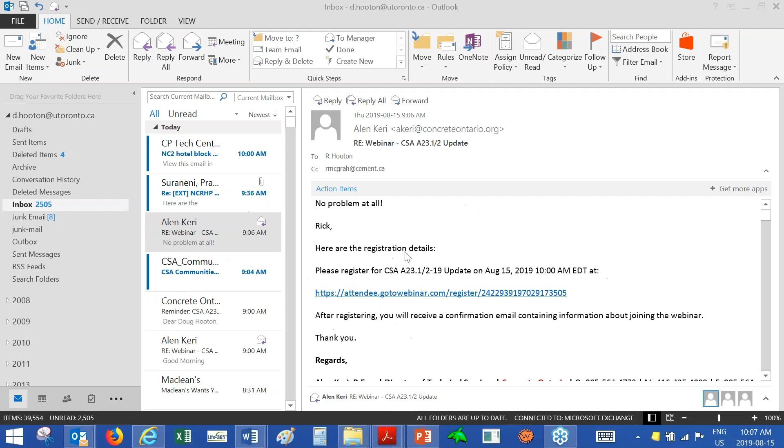Okay, great. I will wait to show my screen. Okay, get up and running. So you can see my screen now? Yes, you're good to go. Okay, hopefully everybody can see it.

Well, good morning, everyone. Hopefully you can stay awake for this exciting presentation on the new A23.1 and 23.2 standards. So the English version of the standard was published in late June. As Alen said, we were waiting for it.

So it has a number of revisions. The French edition, they've had some issues with it because of the translation problems. It probably won't be out till September in French. And of course, because it's the 19, we sequence these things. So the cement standard came out in 2018, the A3000. So it's referenced in the 2019.

Now that the A23.1 is out, we had to meet the deadline to be referenced in the next version of the National Building Code. And then once the National Building Code adopts it in 2020, the Ontario and other codes will pick up on it. The provincial codes will pick up on it as well. So there's a sequence to the way the CSA standards are organized, so we feed into the building codes.

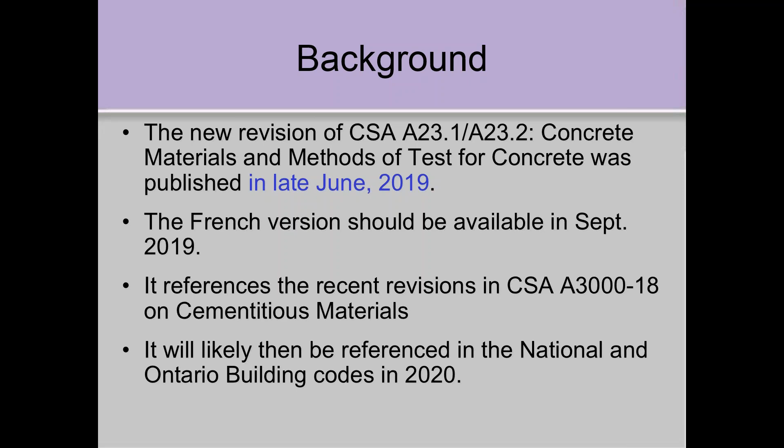And just to mention the cement standard, which came out last year, one item of possible interest is that we're looking at different supplementary cementitious materials. We have fly ashes, slag, silica fume, and some natural pozzolans, but one that's been introduced is ground glass, municipal ground glass that's been collected and crushed. It's not covered in the A23.1-19 yet, but it probably will be in an amendment. And because of all the recycling of glass, ground glass as a pozzolan is occurring both in the US and Canada.

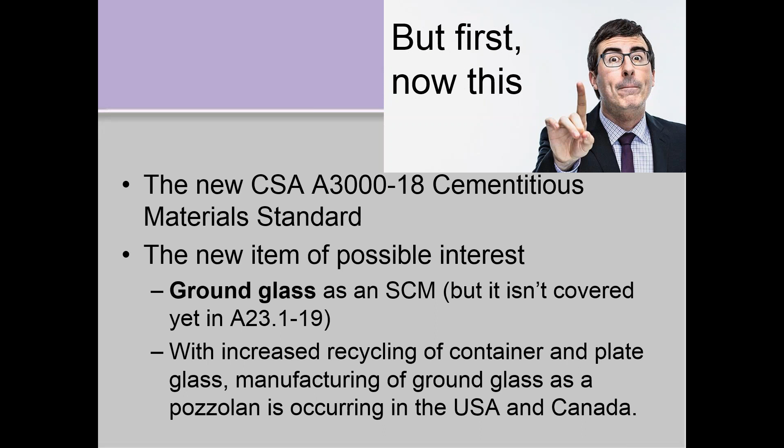I think there's 5 companies in the US and at least 2 companies in Canada. I think Quebec and New Brunswick have companies creating ground glass to use as a pozzolan, because it's glassy silica, which is essentially what SCMs are. And so I thought I'd spend 2 slides on that just to explain it, because it's not in A23.1 yet, but you may see it at some point.

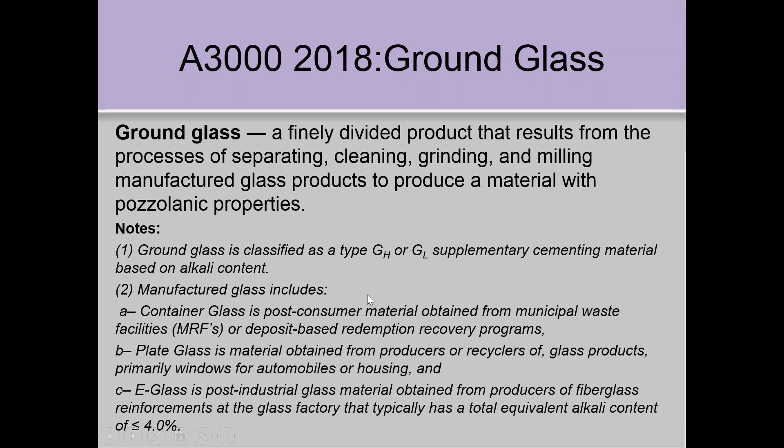So anyway, it's just clean glass that's been ground up to the cement fineness. And there's 2 types of glass. The bottle glass is high alkali glass, so we call that G sub H. And if it's from fiberglass recycling, it has a lower alkali, so they call it G sub L. But I don't think there's anybody doing the fiberglass one in Canada. So it's container glass, plate glass are the main components here. And they're very consistent in quality. Container glasses are almost all identical in composition. And it works as a very effective supplementary cementitious material when it's ground up.

But the main concern with it is the high alkali content. It's up to 13%, maybe even higher sodium equivalent alkali. That way, if you had an ASR problem, you wouldn't want to necessarily use this material as an SCM. But you can control it if you put enough regular fly ash and slag together with it.

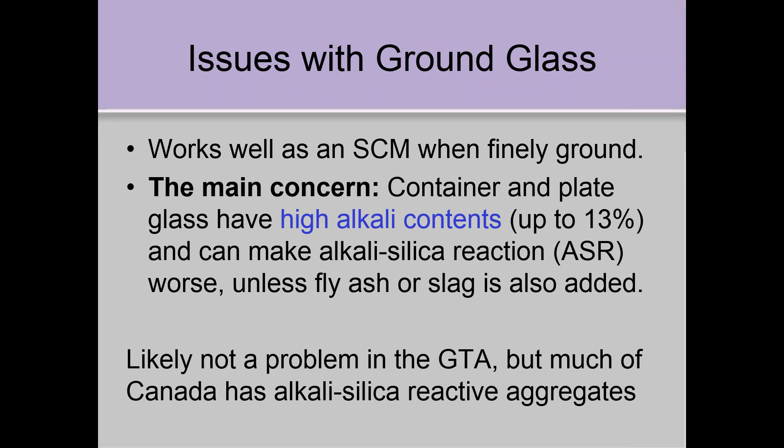And that sort of work's ongoing, and I think that's what we're looking at before we adopt it in the concrete standard. Now, ASR is not a big deal in the Greater Toronto area, but much of Canada has alkali silica reactive aggregates, so it would be a concern.

Okay, on to A23. So the way the standards committee works, we had 38 voting members and 31 associate members that represent different parts of the industry. We have producer members, which would be the concrete producers, raw materials suppliers, which would be the aggregate and cement and admixture suppliers, service professionals, which are the consultants, testing agencies, users, which would be people like MTO and that, general interest, which would be somebody like me who's just an academic or has no stake directly in industry, and then regulatory interest members, which we don't have any, I don't think, on the committee.

The committee up till the new edition came out was chaired by Chris Rogers, formerly with the MTO, was their geologist petrographer, and I've just taken over since our last meeting in May. And the executive committee of the new committee that will come out with the next edition in 2024, Bart Kanters from Concrete Ontario is on the executive, along with Phil Trunk, formerly of CRH, Mike Thomas from University of New Brunswick, and Gordon Lehman from Stantec, out in Dartmouth, Nova Scotia.

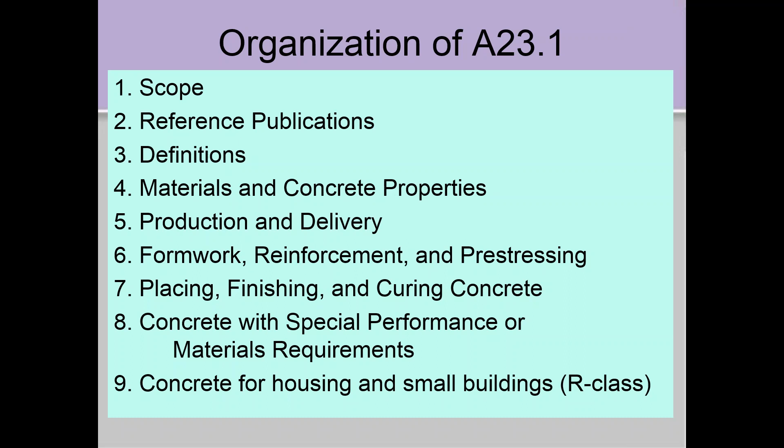8 is concrete with special performance or materials requirements, so all the different specialty materials are in there, as opposed to the regular ready mix. And I'll walk through a couple of those. And then chapter 9 is on residential housing and small buildings, the R class.

So section 8, as I mentioned, all the specialty ones. We have high performance concrete, which has been there, but we've added a new section of ultra high performance concrete, since that has made its appearance in Ontario in the last 5 or 6 years. And we have a new annex that goes into ultra high performance concrete. It's almost like a specification, but it's non-mandatory. It's an annex. The other ones are pretty much the same.

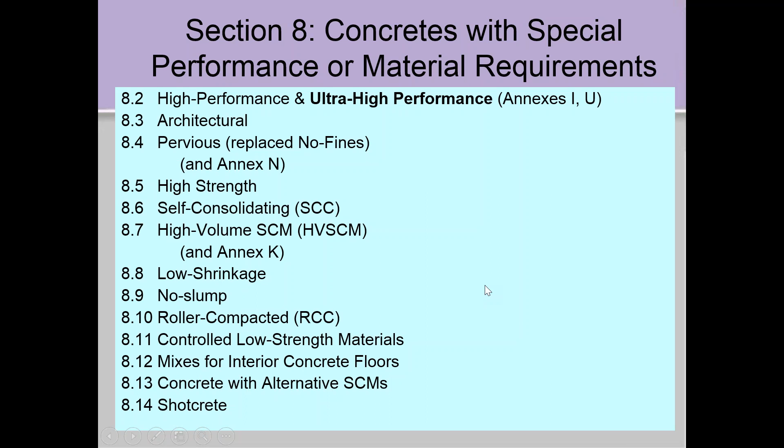We have pretty much the same. And I think the shotcrete's fairly new as well. It's been added to the section on shotcrete. Okay.

So I'll walk through the major changes, then I'll go into more detail. One of the biggest changes is in clause 4. And we've taken a bunch of the stuff out of clause 4, which people were concerned that some of that stuff was contractual information - it shouldn't be in the body of the standard. So separating out the requirements for the concrete from the contractual stuff, we put the contractual related information into standard practices, which are directly referenced in clause 4.

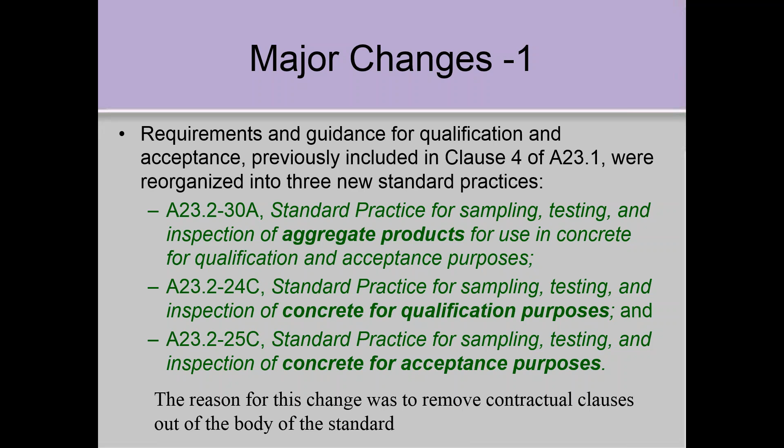So we have 30A for sampling, testing, and inspection of aggregate products for use in concrete - so it's the aggregates one. Then the 2 for concrete are 24C and 25C: 24C is sampling, testing, inspection of concrete for qualification purposes, and sampling, testing, inspection for acceptance purposes is 25C. So separating out the qualification requirements from the acceptance requirements.

We've also made substantial changes to the section on mass concrete, including the requirements to submit a thermal control plan for controlling and monitoring temperature and temperature gradients. A lot of the big contractors are doing this already, so it's a matter of trying to bring things up to speed to avoid some of the problems that have been going on with thermal cracking. Because mass concrete isn't necessarily things bigger than a meter anymore - with high cement contents, there's substantial heat in even smaller elements now.

We got new requirements for slump of concrete for interior concrete floors, updated Annex P on potential deleterious impact of sulphide minerals in concrete aggregates, including some new test protocols related to that. And this has to do with a big problem that happened in Trois-Rivières in Quebec over the last 5 or 10 years, where there were huge durability problems, and I'll talk more about that later.

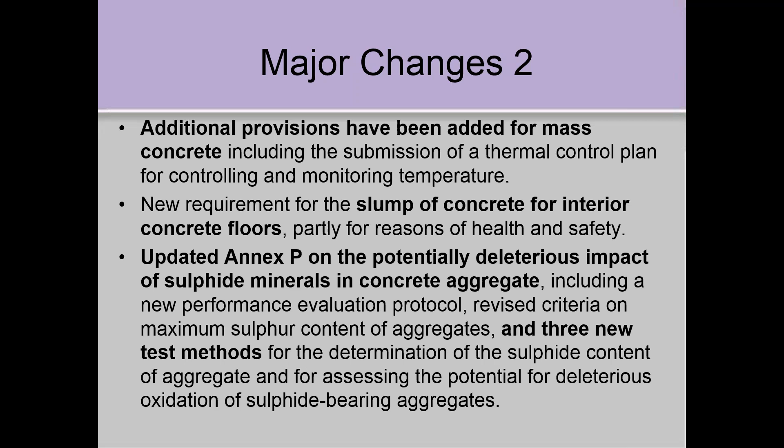So there's some new requirements for testing aggregates, which will impact aggregate suppliers across Canada, and I'll talk about that. And I said there's a new annex on mass concrete, and the new Annex U on ultra high performance concrete. We have two classes, minimum strengths of 120 and 150 megapascals. But some of these concretes are getting 250, 300 in some cases, but we've set these limits at 120 and 150.

And we have one new test method, 26C, A23.2-26C, bulk electrical resistivity of concrete. And again, this is similar to the 23C, the rapid chloride permeability test, but it just measures electrical resistance, and instead of spending the whole day measuring the Coulomb values, you can do this test in about 1 minute, and it essentially gives you the same information.

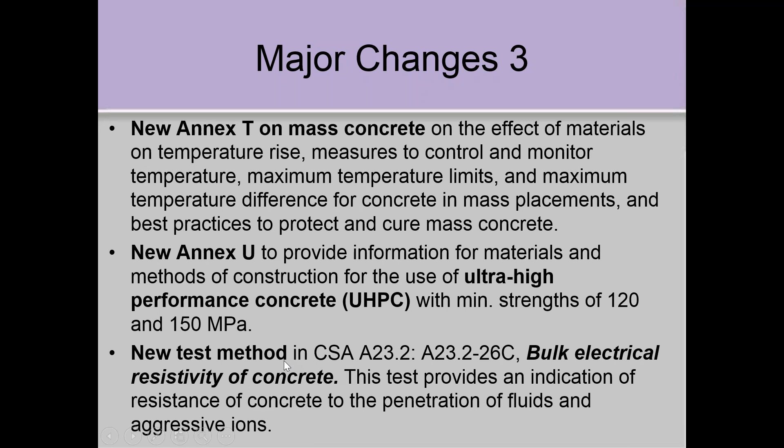One other change, the only change to Table 2, the exposure class table, is this thing I've circled here to separate out whether concrete's going to be exposed to freezing or not. There were some concerns raised, especially with higher strength levels, like the CXL where you need 50 MPa, that if you didn't have freezing thawing exposure, it was difficult in some cases to get 50 MPa or the required strengths with air. And there was no need for air because they were never going to see freezing and thawing in service. So the idea is we've added that new column to say if it's not exposed to freezing, the air content requirements are not applicable. That's what the N/A stands for. It's just a clarification issue.

There's been no other changes in the standard except to say, look, if you don't have freeze-thaw, you don't need to supply air. Sort of a common sense approach, but it had to be outlined because some designers were not accepting it otherwise.

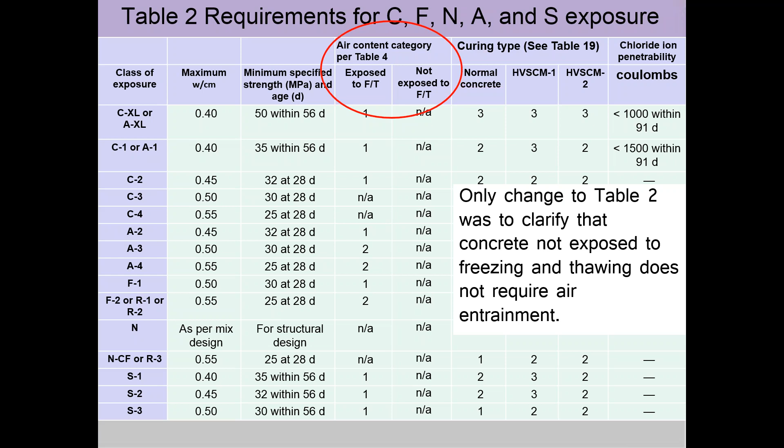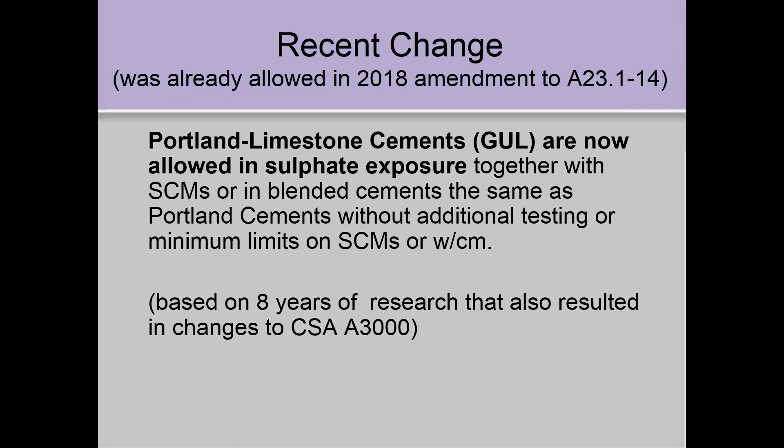This change was already in an amendment that came out last year in the A23 - that Portland limestone cements, those cements that have up to 15% interground limestone, are now allowed in sulfate exposures. Before, we had some special requirements for testing them if they're going to be placed in sulfate exposures. But based on extensive research that I was involved in, and Mike Thomas and others were involved in, we've now removed all those requirements. So now you just test it the way you would with any other cement, and there's no special limits on the concrete.

And well, there it is there. So we've changed Table 3. We've added moderate sulfate limestone B for blended cements - that's what MSLB stands for - and high sulfate limestone blended cement to the table categories for the S1, S2, and S3 categories, which are based on severity of exposure.

We've also added HSE, an equivalent, because some specifiers, especially in Alberta, were not allowing ready-mix companies to supply a GU cement plus, say, a slag or a fly ash as equivalent to a blended cement. They said, well, it's not on the list. So we've created HSE as equivalent to a high sulfate resistant blended cement, to say that if you make SCMs, you can use GU cement and call it a sulfate resistant equivalent. It seems like common sense, but there were some designers, certainly in Alberta, that were not accepting this, which was causing problems. So you can use those cements, and for anything that's not a straight Portland cement, there's performance requirements in terms of a mortar bar expansion test. That's always been there.

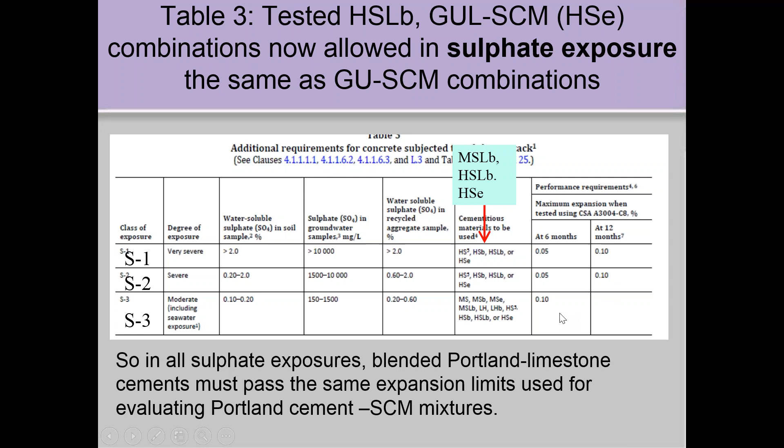So since I'm on the sulfate story - where are sulfate exposures? Of course, there's big problems in the prairie provinces. The lower parts of Alberta, Saskatchewan, and Manitoba are very high, ultra-high exposure sulfates - it's an old seabed. But there's also sulfates near Niagara and along Lake Erie because there's gypsum-bearing layers in the shales there. In the Toronto waterfront, south of Front Street, is a moderate sulfate exposure because, again, that same shale layer - which is now basically landfill south of Front Street - used to be the lakefront.

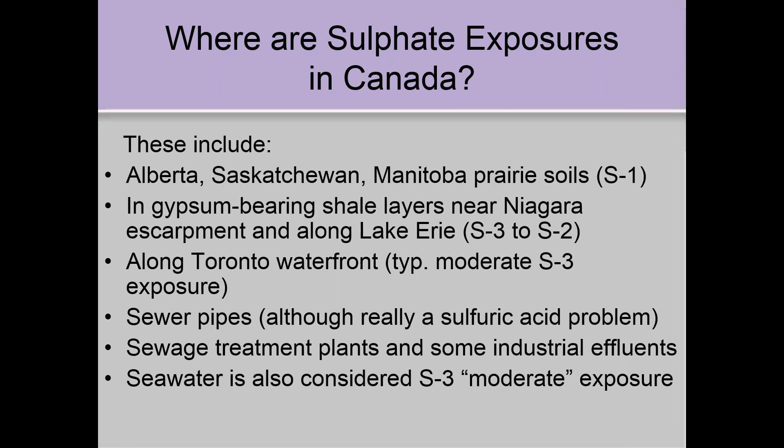And of course, there's problems in sewer pipes where we require sulfate-resistant concrete, although it's really an acid problem because of the bacterial acid formation. Sewage treatment plants, some industrial effluents, and seawater is considered a moderate exposure. In addition, of course, it's always chlorides because of the salt in seawater, but it's also a moderate sulfate exposure. So that's where the exposures are.

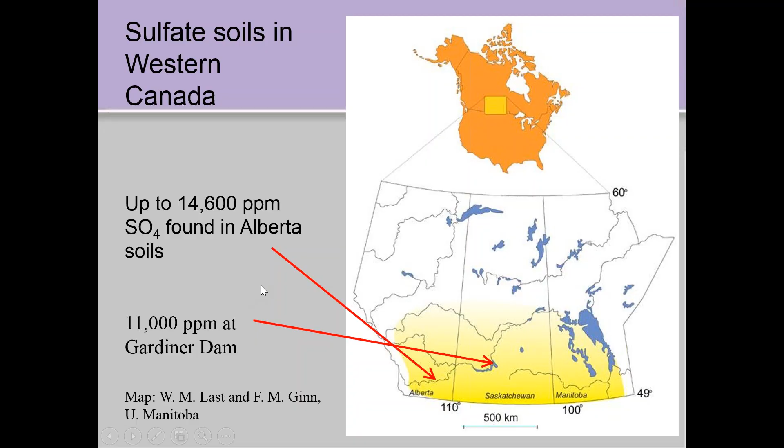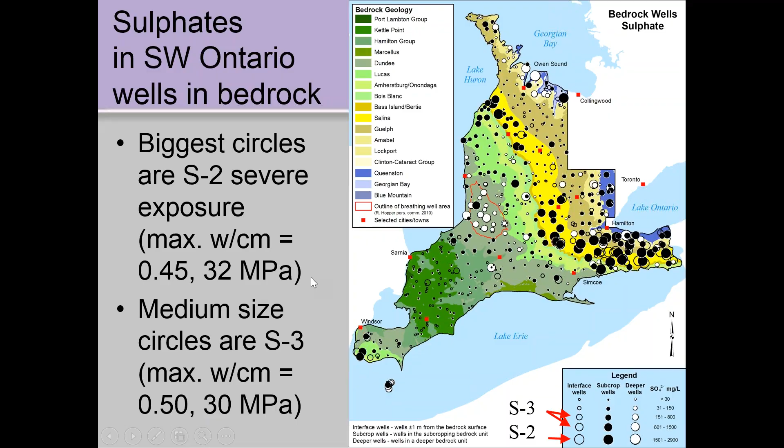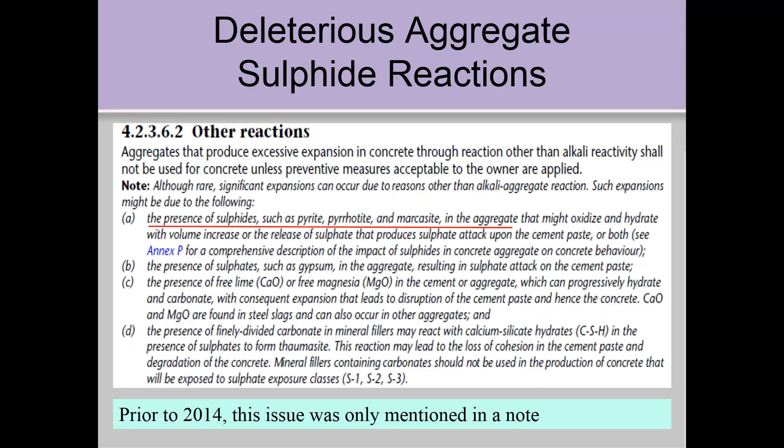I mentioned the sulfides in aggregates, this Trois-Rivieres problem. We had a note, underlined, that certain sulfide minerals—people are aware of pyrite, iron sulfide that causes rust stains—but pyrrhotite was one that nobody had paid much attention to. It's far more severe than pyrite and causes some durability problems, which I'll show you. There were serious problems around Trois-Rivieres, Three Rivers for you non-French speakers.

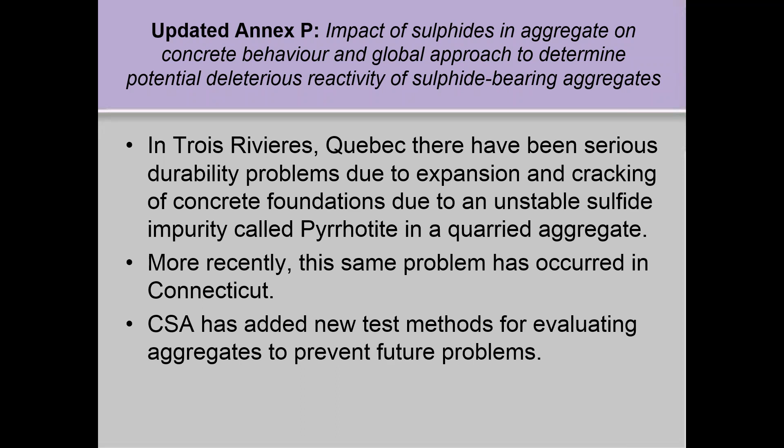The same problem has now outcropped in a very similar rock formation in Connecticut, just south of there, and that's caused some big legal issues. So we've developed some new standards. There's been a lot of research on this, especially by Benoit Fournier at Laval University and Medhat Shehata at Ryerson, to come up with new test methods, which are located in Annex P of the standard.

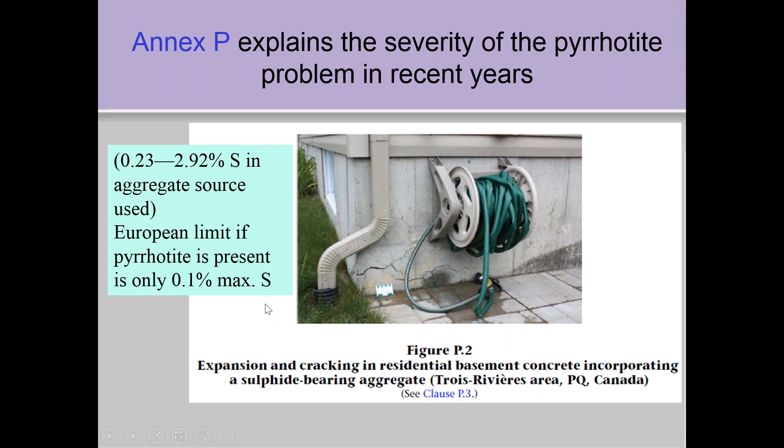The Europeans have a limit of 0.1% sulfide sulfur if it's pyrrhotite. They've had to raise over 100 houses. It came from one quarry near Trois-Rivieres, and these are brand new homes. They basically had to raise them up, remove the foundations, and replace them.

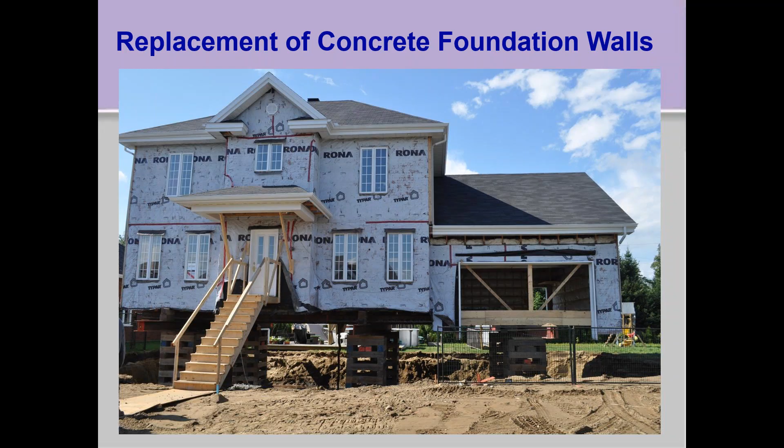It's been making the news since 2013. People are looking for money from the government, and Quebec's thrown money at it. The cost of moving or fixing one house was $125,000, all because somebody didn't test the aggregates.

If they'd tested the aggregates, and maybe there was more definitive information for testing, hopefully this would have been avoided. It's relatively unique to Quebec at this point, but there's potential for it to occur in other areas, so the new test requirements will be cross-Canada requirements for aggregate testing.

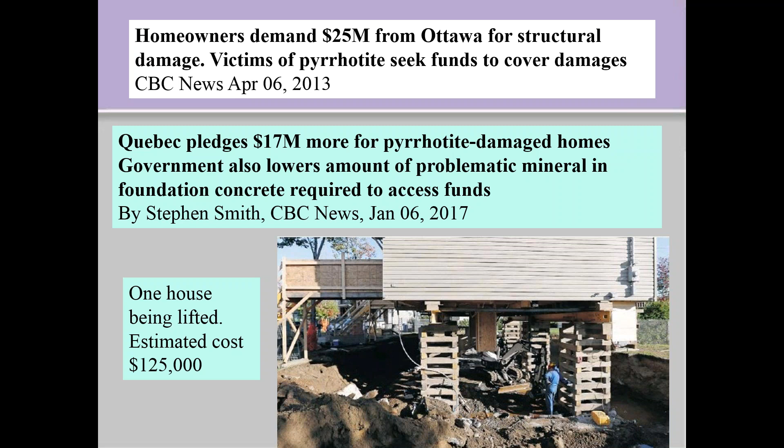So the test methods we've put in there: look at the sulfide sulfur content of aggregates. If it's greater than 1% total sulfur, you're supposed to reject the aggregate. If it's greater than 0.15% but less than 1%, you need to do some of this testing. And if it's less than 0.15%, you can accept the aggregate without any testing. So it's going to require aggregate producers to measure the sulfur content of their aggregates—that's a new requirement.

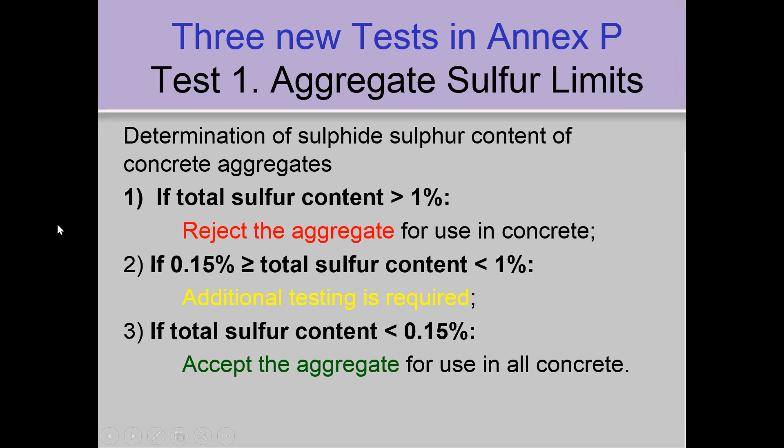So that's the first test, test the sulfur. The second one has a funny name, oxygen consumption test, because sulfides are reduced minerals, so they all want to oxidize, which is what pyrite does and causes the rust. It oxidizes, and pyrrhotite oxidizes more severely. So they measure the amount of oxygen you put in a sealed container with the aggregate, and measure the amount of oxygen consumed by the oxidation process.

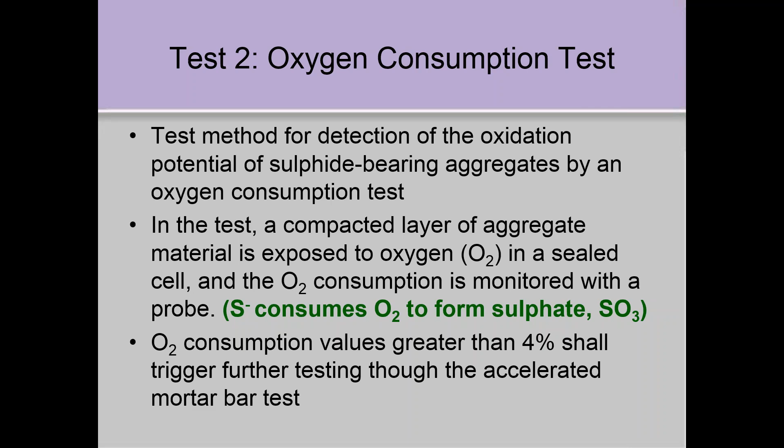And if it's above a certain amount, then you do a mortar bar test. Test number 3 is a 90-day test with mortar bars made from the crushed aggregate after some cycling in an oxidation fluid. Hypochlorite is just a way of oxidizing the sulfide minerals so that they expand. You can see the cracking of a mortar bar there where they've had this problem.

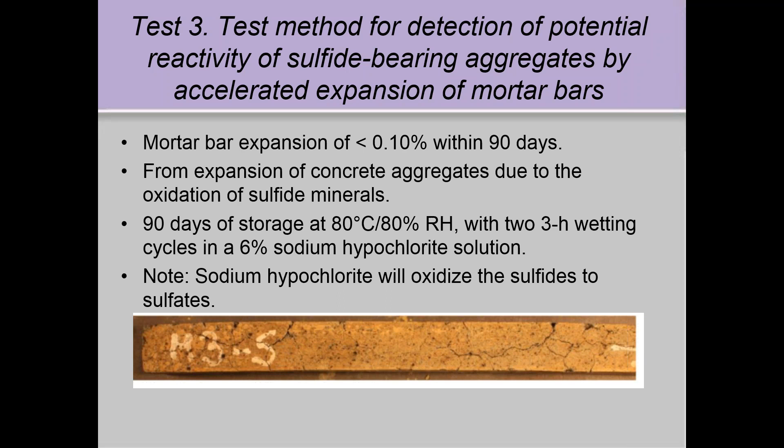So it's a pretty severe set of tests, but again, it's to address this issue, which has cost huge money. In fact, the federal government has just put something like $4 million into a research program at Laval University to further work on this issue so it doesn't happen again.

While I'm on aggregates, I just want to remind people that starting in 2014, A23.1 allows combined aggregate gradations—optimized combined aggregate gradations—in addition to the standard approach of picking a fine aggregate and a coarse aggregate, which often leaves a gap and doesn't lead to optimum packing. You can actually optimize the whole gradation as a single fraction.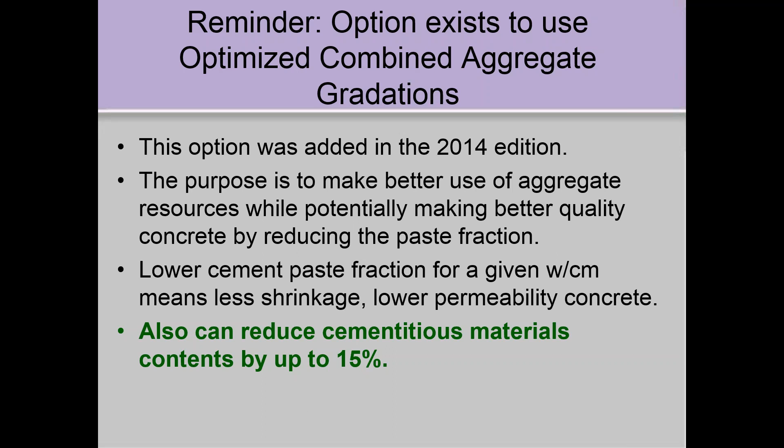And there are advantages to doing that if you have enough bins at the plant. Even 3 bins is sufficient. You can lower the cement content of the concrete, maybe up to 15%. And if you have less cement paste in the concrete, you're going to get less drying shrinkage and lower permeability, because permeability occurs through the paste fraction. So there's some economic advantages, and there's also technical advantages to doing this.

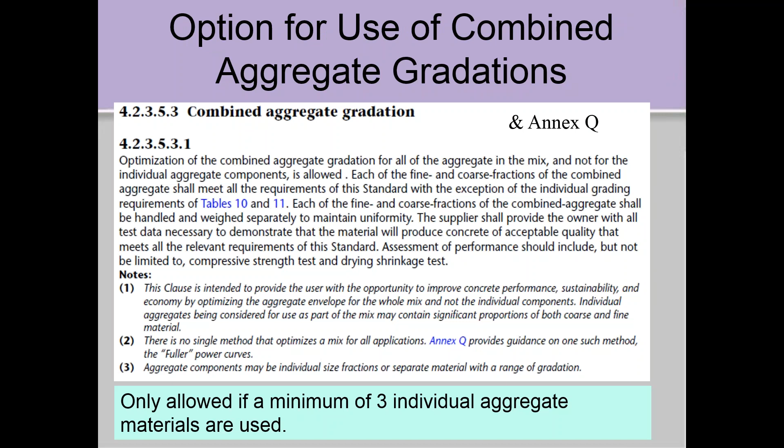It's in section 4, again, combined aggregate gradations. It's also an example given in Annex Q. And you basically optimize the whole gradation of the aggregate. Then for testing purposes, you split it on the 5mm sieve, and test everything above 5 as a coarse aggregate, and everything minus 5 as the fine aggregate.

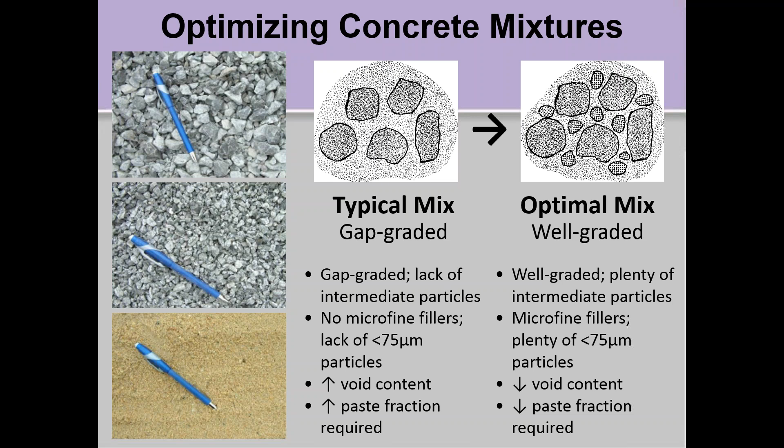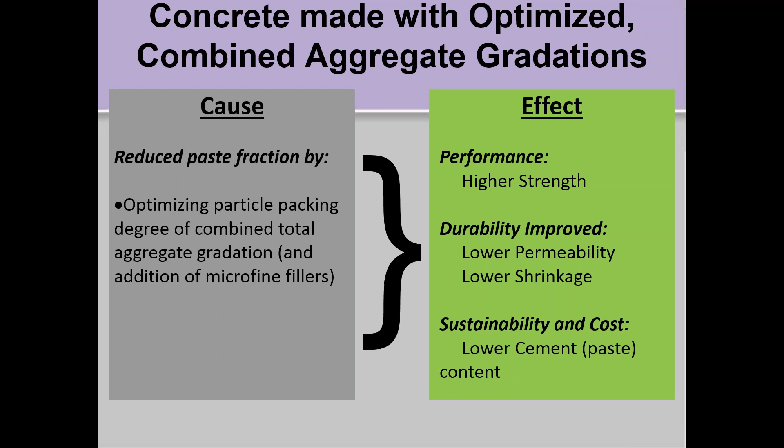So often this can be done just by fitting an intermediate material, even waste chip material, that fills the gap between the fine and coarse aggregates, so you get better packing of the aggregates. And again, you can get higher strengths, lower permeability, lower shrinkage, and better, more sustainable concrete because you're reducing the cement fraction and lowering the paste content.

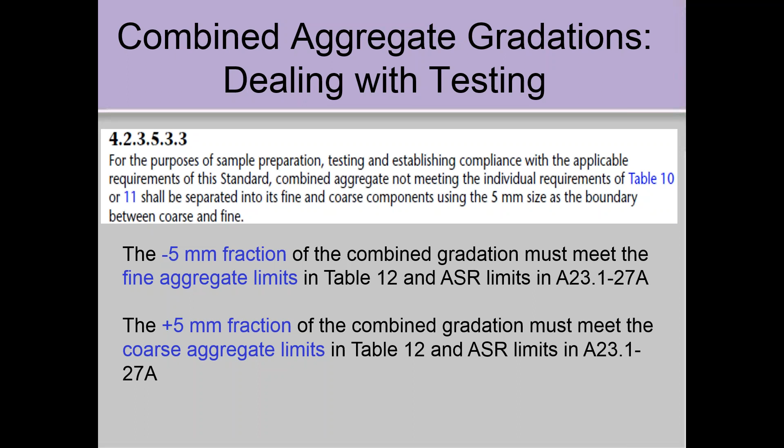Anyway, there's the split, and you test according to the aggregate tables based on the plus or minus 5mm fraction of the combined aggregate. So anyway, it's out there. I'm not sure how many people have tried it, but it offers an opportunity to reduce cement content in concrete and make better quality concrete.

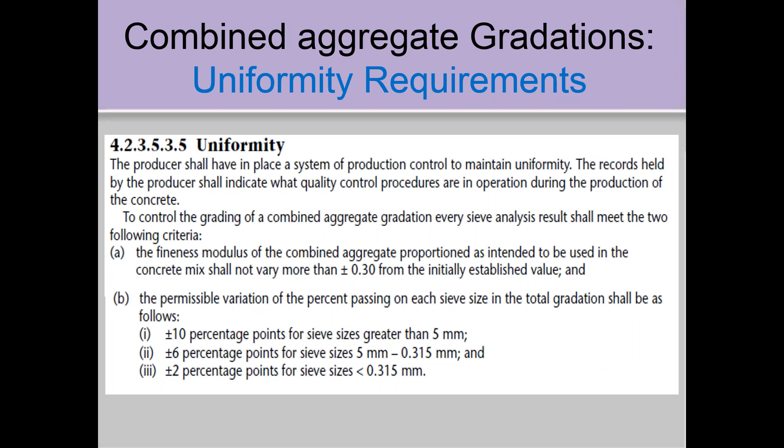And there's some uniformity requirements to check that you're getting a uniform combined aggregate gradation, based on the sieve fractions not changing more than a certain amount over time.

Okay, on to the 2019. Now, section 4.4 probably has the biggest impact on the producers here. So as I said, we've developed these new standard practices and taken a lot of the information out of 4.4 and put it in these standard practices, and 4.4 just references these practices.

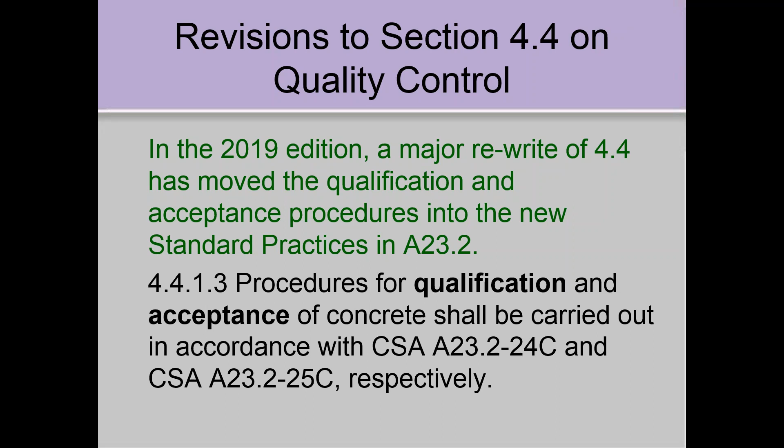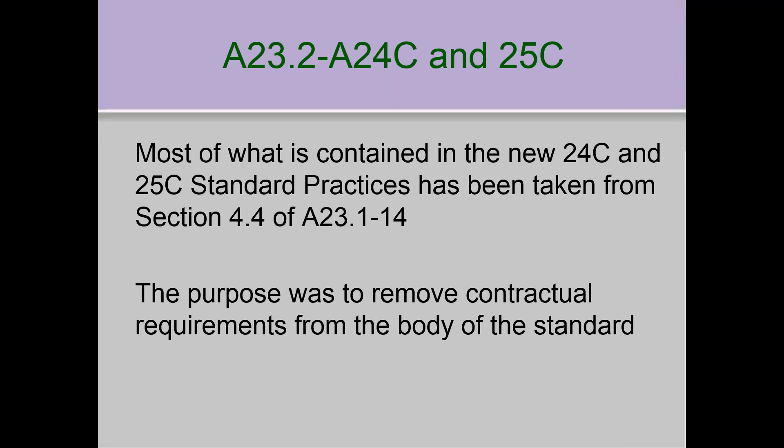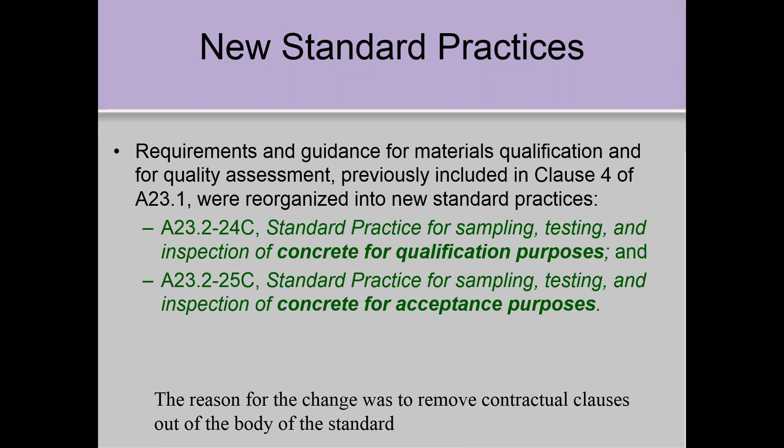And again, to remove the contractual bits out of the body of the standard, which a number of agencies, like the MTO, had problems with. And as I said, we got the one for the practice, 24C for qualification purposes of concrete, and 25C for acceptance purposes.

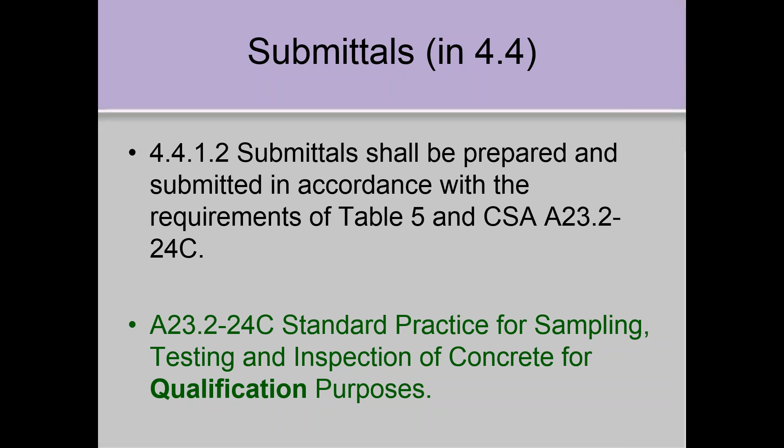And so 4.4 now says things like 4.4.1 and 2: submittals shall be prepared and submitted in accordance with the requirements of Table 5, which is the performance versus prescription table, and A23.2-24C, which is the standard practice. So for the submittal purposes, you go to the standard practice for things you need to put in the submittals.

And submittal requirements shall be, this is out of into the standard practice now, 24C, appropriate to the scope, size, and nature of the project. In other words, for small projects, you're not going to do as much as for a big project. And the supplier shall submit documentation to the satisfaction of the owner demonstrating the proposed mix design will achieve the required strength, durability, and performance requirements. That's all in the standard practice now.

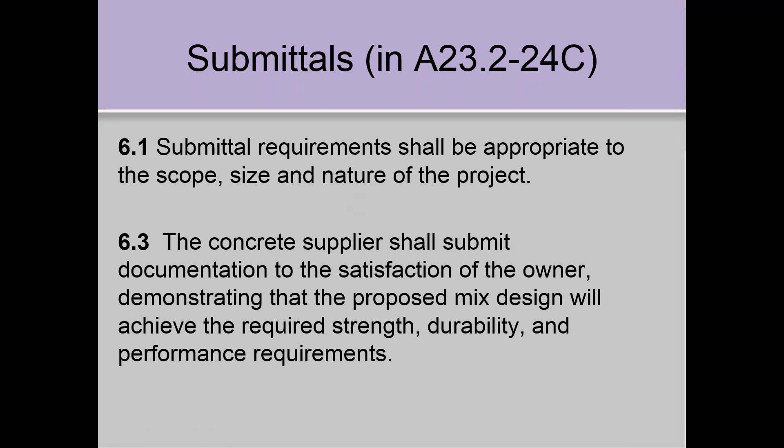And unless otherwise specified, include a review of data demonstrating the potential performance of the proposed mix design, and if required in the contract documents, could require trial batches of a proposed mix design to get the test data.

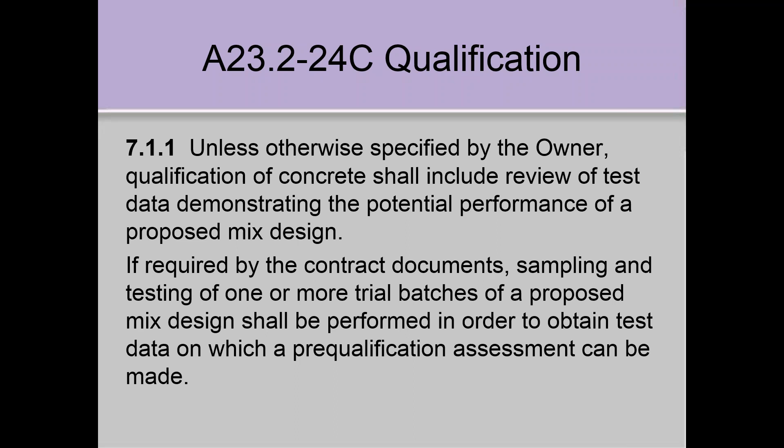And the practice repeats what's in Table 5 for the performance alternative, what the supplier, the concrete supplier, has to certify, which is right out of Table 5. Certifying the plant, equipment, and materials comply with the requirements of the standard; certifying the mix design satisfies the standard; and production delivery meets the requirements of the standard; certify the concrete complies with the performance criteria specified; implementing a quality control plan to make sure the owner and contractor's requirements will be met, if required; and provide documentation that the supplier meets industry certification requirements, if specified. So that's right out of the existing Table 5. There's nothing new there, it's just put it right into that standard practice.

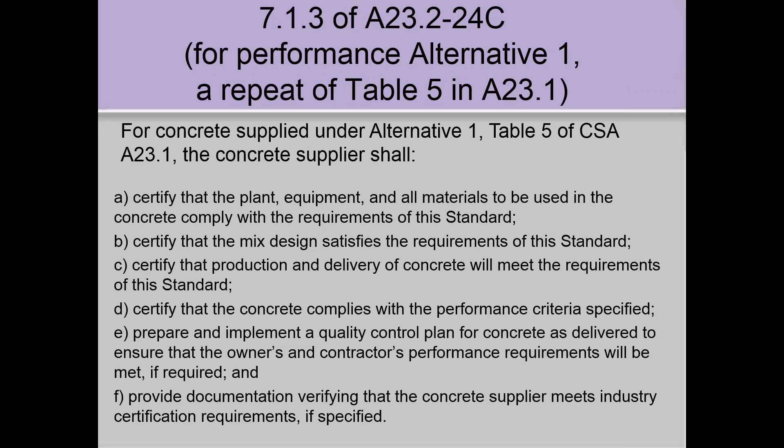So back in what's in 4.4, they've added material on the testing labs being responsible: lab and field personnel shall meet the requirements of A283 to the appropriate category, or ISO 9001 — that's in because the Quebec industry uses 9001. So the lab people have to be certified. All testing reports are distributed and available for audit by the certification, and all test data has to be reported within 5 days. I don't think that's changed, but that's the test lab responsibilities.

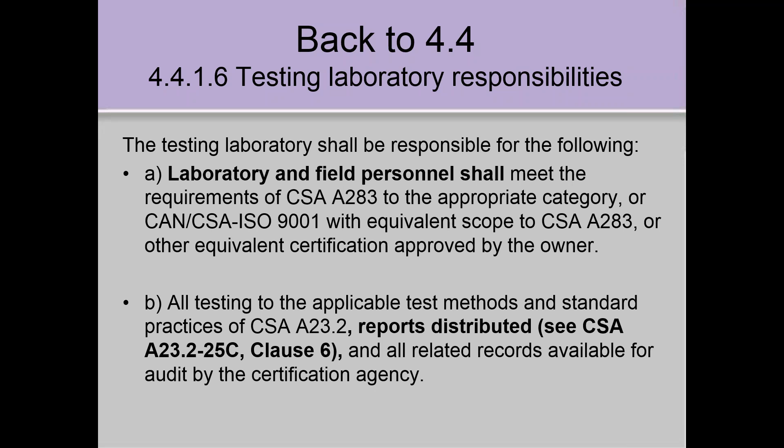And for acceptance purposes, as opposed to qualification, you go to 25C to do all the sampling and testing according to 25C. And then subject to project specs, the owner may accept or reject proposed materials and mix designs based on information provided in the pre-qualification submittal. But that's a separate issue.

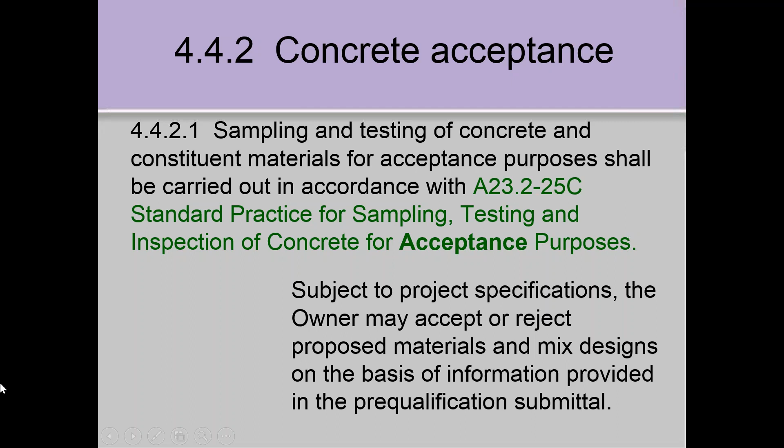Okay, so a lot of it — there's almost no change in 4.4 now, almost no changes in total, but a lot of the information's just been transferred to these standard practices. So there shouldn't be anything too much new there. We just tried to make almost no changes, just moving material, some sections where we thought it was contractual, to these new practices.

On reporting test results, this is in clause 6 now. Test results should be provided to the owner, contractor, and concrete supplier within 5 working days of the test. Both lab and field reports shall include the information required by the test methods. There's a sample test report for strength in the annex of A23.2.

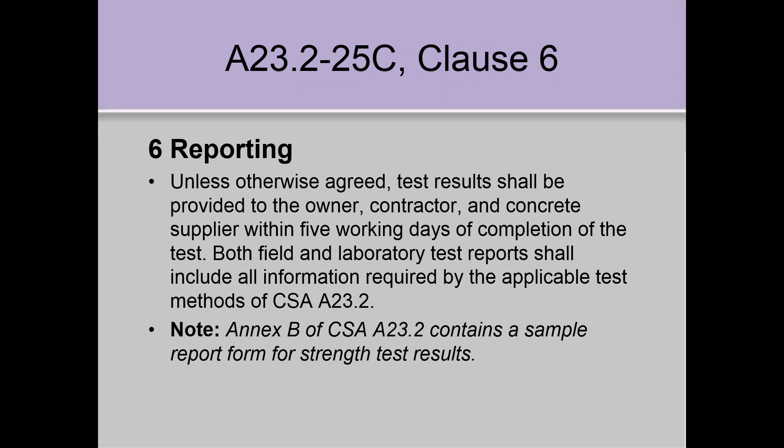If there's a dispute where there's more than one set of test results available from independent testing labs certified to the CSA, all test results shall be considered by the owner unless there's a defined referee testing program in place, like I think MTO has. So it requires people to consider all the test results. If the concrete supplier has their own certified lab testing result, they can submit that data and it has to be considered.

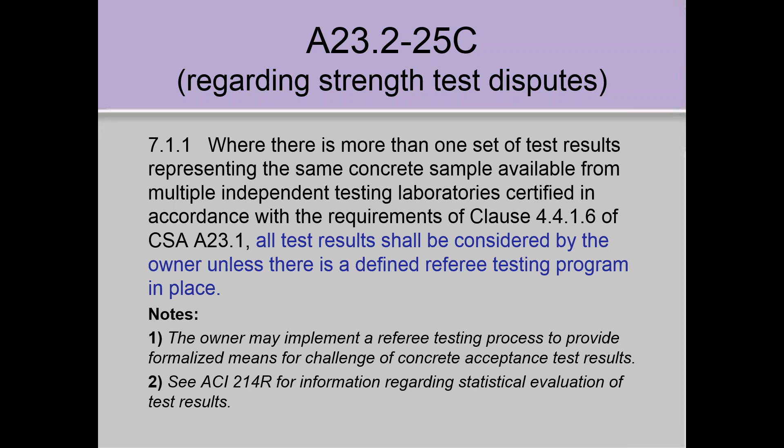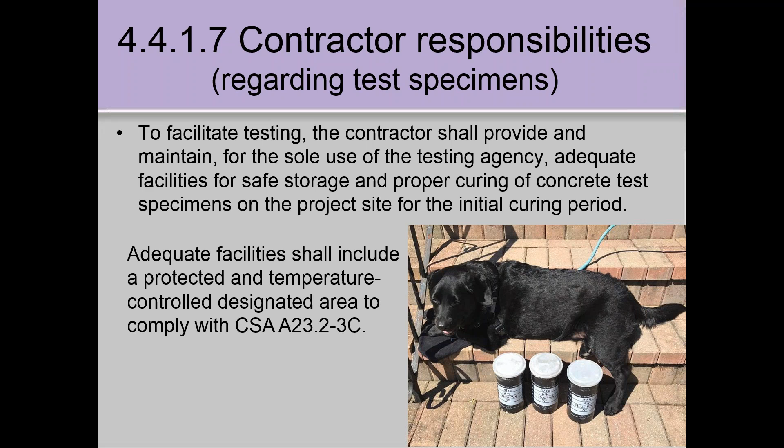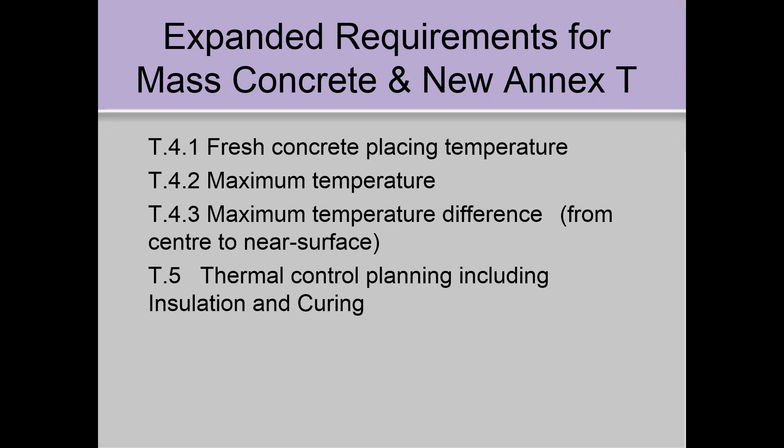This is the mass concrete section in the new Annex T now. It covers fresh concrete placing, maximum temperatures, maximum temperature differences, meaning from the center to near the surface, thermal control plans including insulation and curing. So that's all covered in this new annex, a lot more information, and it's to deal with some of the problems like this.

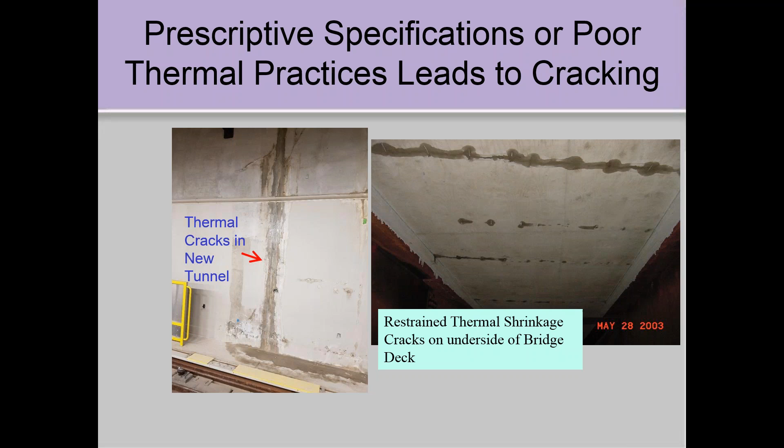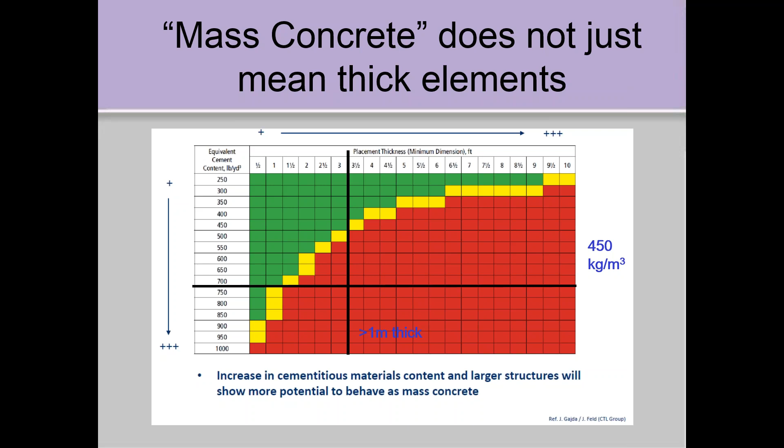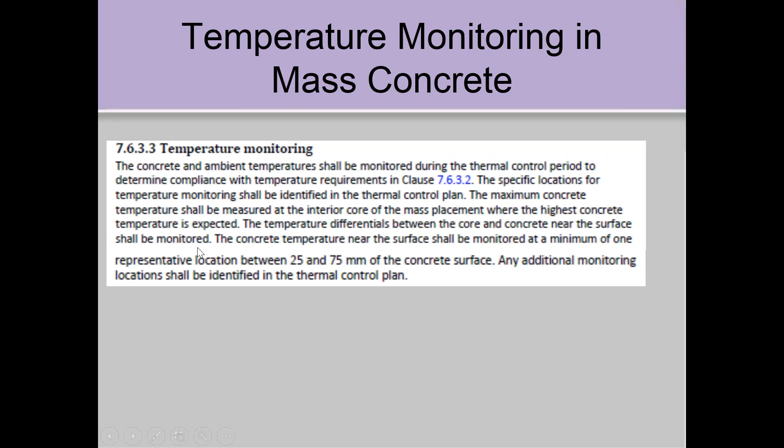It talks about how to do temperature monitoring, measuring the near surface temperatures between 25 and 75 millimeters from the surface, as well as the interior of the concrete, and looking for differentials.

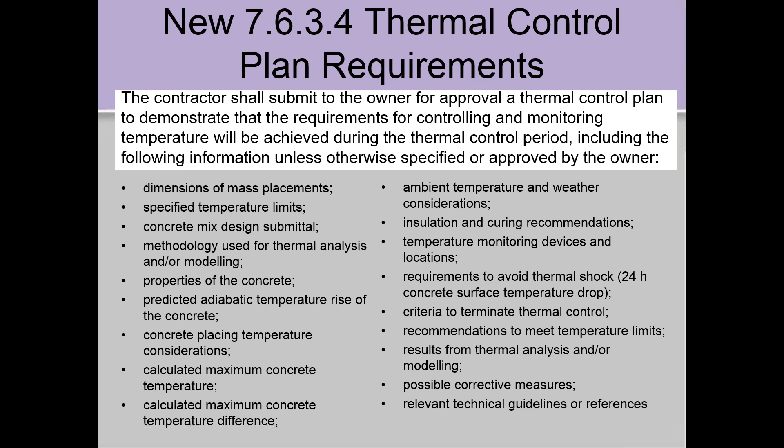So there's a whole bunch of stuff that needs to be done, and a lot of the large contractors are doing this. They put in monitoring systems, and there's a lot more of this going on now because these probes you can put in concrete, and wireless monitoring systems are pretty economic now for big jobs.

It also has information in the annex about insulation, to reduce thermal gradients. They're talking about 20 millimeter plywood, which protects concrete because it's insulating, but steel forms just pull the heat away. There's no insulation at all in steel forms, so you get different performance just by the type of formwork being used in terms of minimizing thermal gradients. So steel forms might require insulation.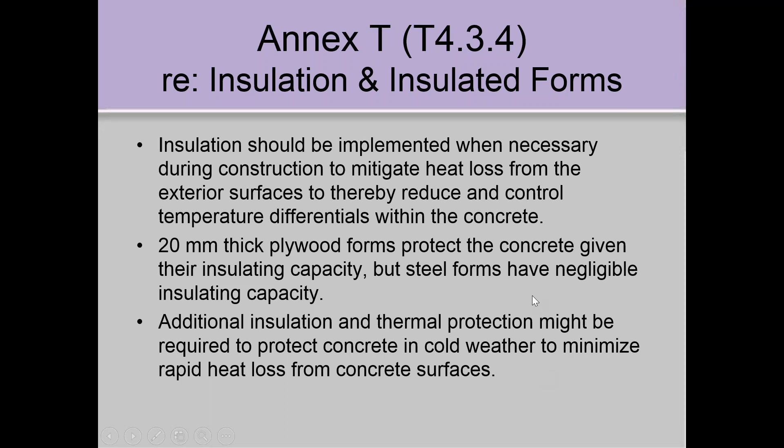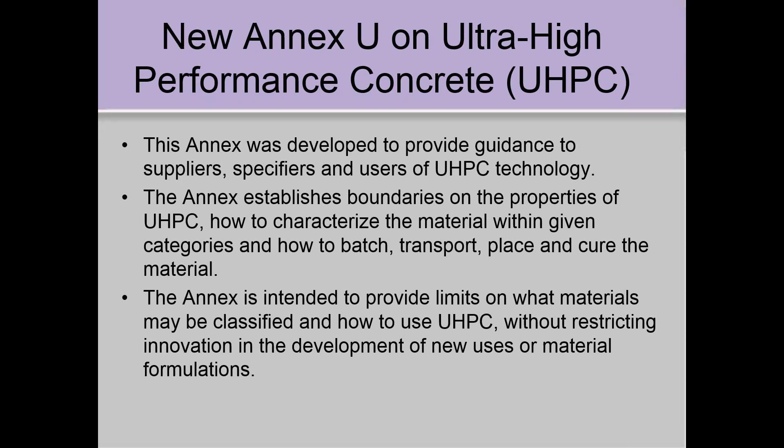Now the other new annex is on ultra high performance concrete, which has been hitting the industry. It's not a huge impact at this point, but it's growing. And it discusses how to deal with it because it's a completely different type of concrete. So it provides information on what's considered ultra high performance.

As I mentioned earlier, there are two minimum strength classes, 120 and 150 MPa. These are tested on even smaller cylinders, 75 by 150, because it's so strong that testing in a regular testing machine would be difficult. And you typically keep them in the molds till they're at 100 MPa.

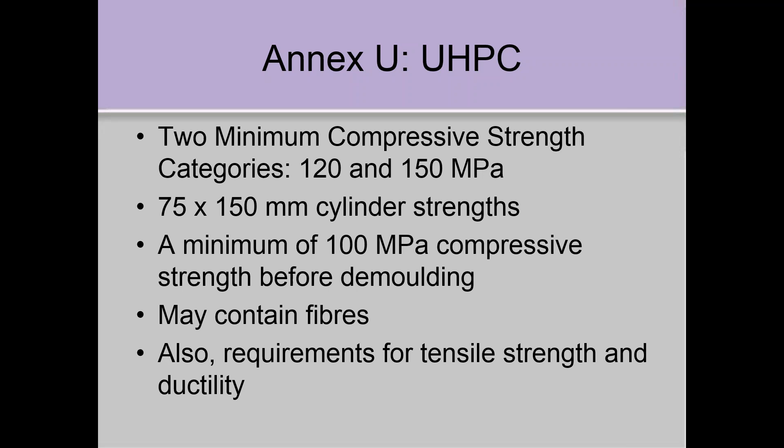Some of these ultra high performance concretes contain fibers, in fact quite a few of them, because a lot of the requirements also include tensile strength and ductility requirements. So it's not just the compressive strength.

So we've got three designations here in that annex, and DL stands for design life. So you have a 50-year design life, 100, or 200. Now they're a bit arbitrary, but they've set requirements for things like abrasion loss for pavements, or things like dam spillways, and salt scaling requirements, which are much tighter than the MTO's requirement of 0.8 kilograms per square meter.

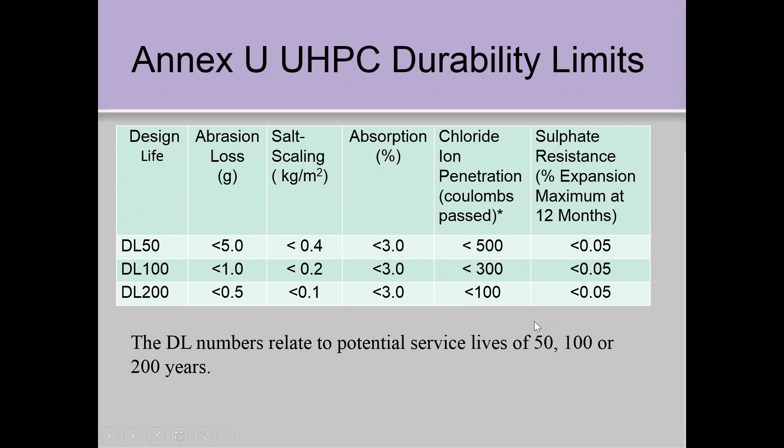Absorption requirements, chloride permeability requirements given as Coulomb values - you can see they're very low - and sulphate resistance. That's what's in there now. It's an annex, so it's not mandatory, but it's there.

And so it's different than other concrete. It involves particle packing. All the materials, including the cement, the fillers, and the fine aggregate materials, are particle packed. The maximum aggregate size is typically masonry sand. Now there are some with up to 8 millimeter aggregate, but typically we're looking at minus 3 millimeter size aggregate. You're optimizing the packing down to the nanometer level with these ultra-fine powders, silica fume, and even finer fillers.

And it requires a lot of heavy mixing to get it to go. It shows them pouring it out of a bucket, a wheelbarrow. We need high intensity mixing, high shear mixing, high superplasticizer doses, and a lot of this stuff. It's very dry to begin with because you're looking at water cement ratios less than 0.2, so it looks like dry sand almost. And you mix it and mix it and mix it, and eventually after a period of time it starts to flow and becomes this liquid material, like that wheelbarrow shown in the picture.

It's typically self-leveling, but to get reproducible results there's a lot of control that has to be exercised. And of course it's expensive - it's in a whole other ballpark for cost. But it shows them here using it for joining panels for precast, some sort of precast deck unit, where they put in high-performance deck units, then the rebars, and then they're putting in the filler strips with the ultra-high performance material.

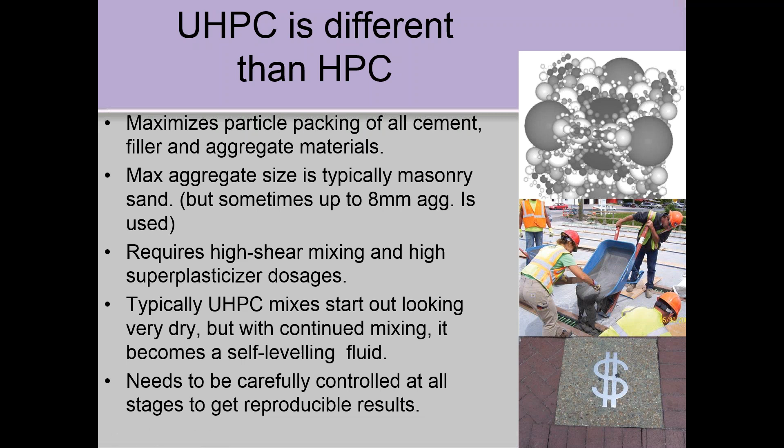And they consider all the fine materials in this, so not just cement and SCMs, but even things like ground powders of various sorts would be considered in this water-fines ratio. It shows the sort of strengths you can get at 7 days steam cured or 28 days water cured, the types of strengths we're talking about. This is an old paper, I just took it as an example of what you can get with these sorts of concretes. So it's a whole different animal.

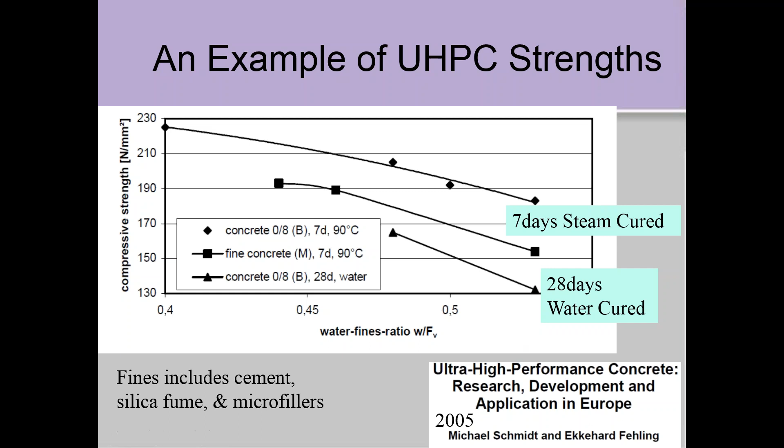And one example in Ontario where it was used is up near Thunder Bay on an overpass or underpass. They used pre-stressed ultra-high performance T-beam pile pier caps, and they made the column forms that are there - that's a column form out of ultra-high performance, stay-in-place column forms. They put them in place and erected them, and put the rebar inside.

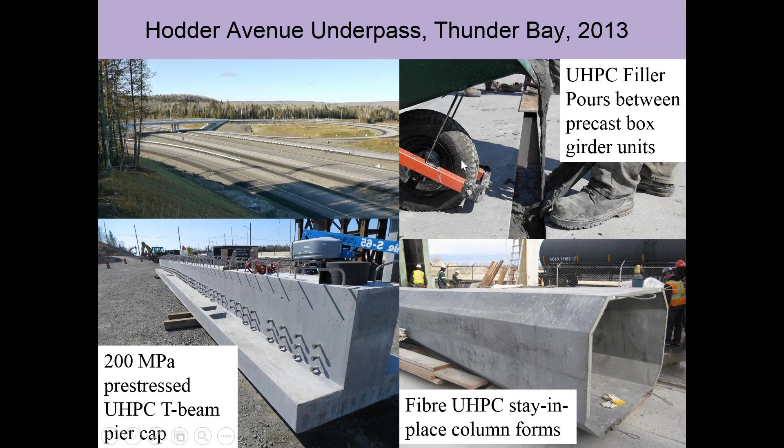They put regular high performance concrete on the inside, so the outer part that's exposed to salt is ultra high performance. And then they used filler strips on the precast box units, filling up the pour strips with this ultra high performance material - that's what it looks like. So that's ultra high performance on the beam here, a cross beam, and then the stay-in-place formwork, and then on the filler strips on the deck.

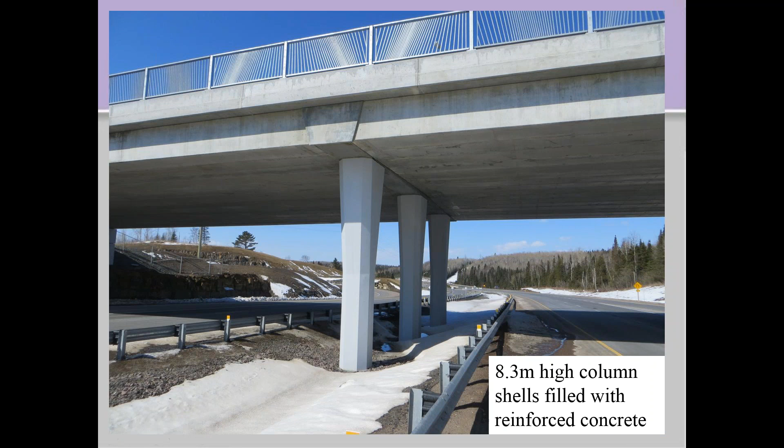Okay, anyway, in terms of A23.2, the test methods, we're constantly updating the format to make sure they have precision statements and the wording is clear. But the only new test method, as I mentioned, is this new bulk resistivity test method, which is 26C. The reason is, eventually, hopefully, it might replace A23.2 23C, the rapid chloride permeability or the Coulomb test.

It is much faster, and you can also test whole cylinders with this method. You don't have to cut discs out of it. You could take a cylinder, measure the resistivity end to end, and then put it in a testing machine and break it for strength. But at this point, because it's new, we've put it in there so people get used to it, and so they can compare the results. There's no test limits yet. We're going to wait and see on that.

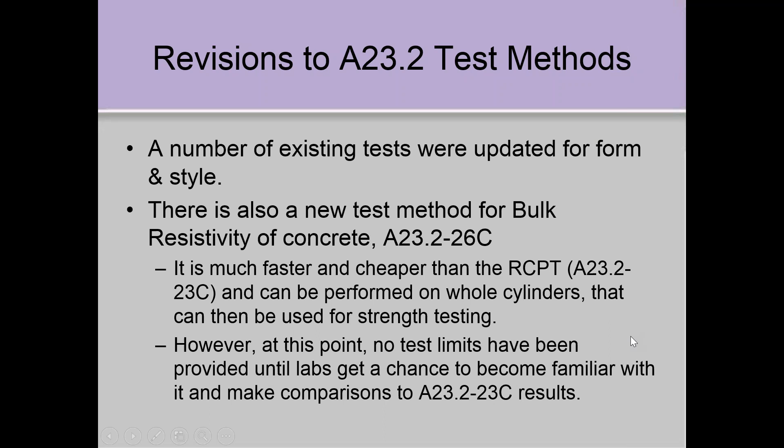So the top test is the 23C. You take a 2-inch disc, or 50 millimeter thick disc, of a cylinder, put it between two cells with salt solution or hydroxide solution, apply a voltage, and measure the electric current that flows through the concrete. You measure that over 6 hours, multiply the current times time, and you get coulombs.

That's the test people have been using for a while. It's a fairly rapid test, but it takes a day to set up to vacuum saturate, and it takes a day to run the 6-hour test. With this bulk resistivity test, you apply electrodes on the end of the cylinder, measure the electrical resistance to current flow, and correct it for the area and length of the cylinder, which is that little equation there.

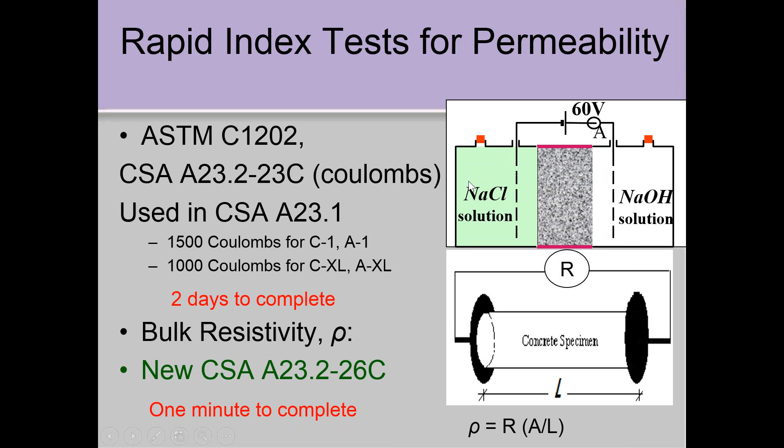So resistance times the area of the cylinder divided by the length gives you a resistivity value in ohm meters. You can do this test in 1 minute. If the concrete's wet, you put it between the two electrodes, the test takes a minute, and you get a result. You basically get the same information as that test that took a whole day, so it makes it much cheaper.

There's at least 3 commercial suppliers, maybe more, but these are 3. Germann Instruments has one, and they use a carpenter's clamp to clamp the electrodes in place to get good contact between the electrodes and the cylinder. Giatec's RCON out of Ottawa uses one with 2 electrodes with sponges on the ends, and they clamp the ends down, or you can throw a weight on top. Prosec has one too, with electrodes on top and bottom with wet sponges, needing a weight on top to get enough contact.

So it's a very simple calculation. It's the resistance you measure multiplied by the area divided by the length. Some of the machines actually have a little computer that does that calculation for you.

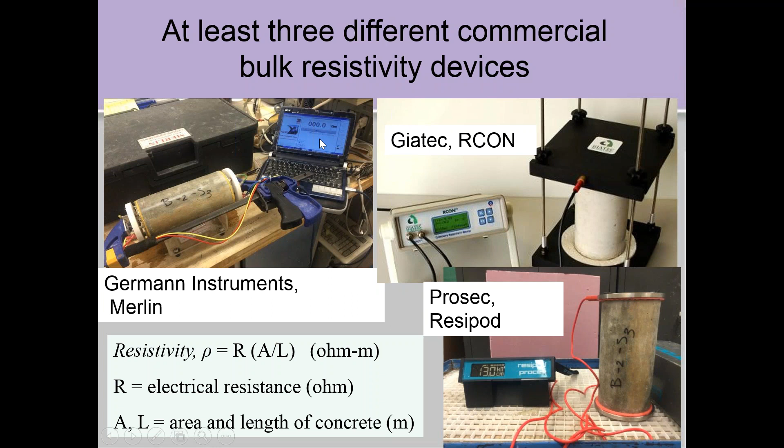Just as a rough comparison, we didn't put this table in because people were resistant to suddenly putting limits in for a new test method. But this provides some rough comparisons to Coulomb values that we're used to. So 1,000 coulombs, which would be ultra high performance concrete, would be around 200 ohm meters resistivity. I think MTO's got a 2,000 coulomb limit, which would be the 100 ohm meters resistivity. If you rank it on the same levels used in 23C, those are the sort of ranges you would have. Right now it's just a rough guide.

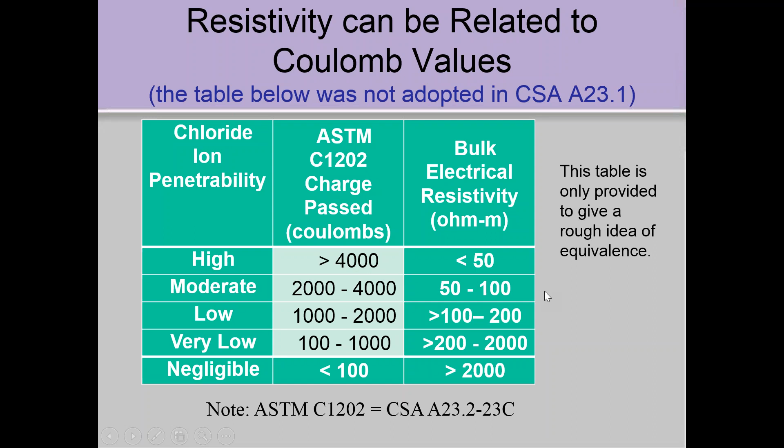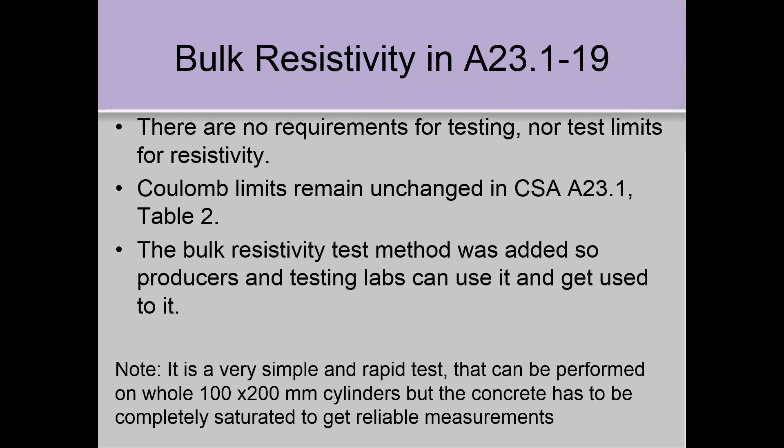A number of labs are doing the tests, so they can do comparative testing and get comfortable with it. It's a simple test, you just have to have a completely saturated sample to get reliable results. If the concrete's not wet, it's a good resistor when it's not wet. If it's saturated, then you're measuring the electrical flow through the pores in the paste fraction of the concrete.

Okay, so I'm getting to the end here. The CSA documents are living documents. Every 5 years we come out with a new one to fit into the building codes, and people on the committee bring forward issues that the industry is facing. We try and deal with them, or correct problems that have existed with the current wording.

So we're trying to move ahead, but the industry changes, materials change, practices change, so we're trying to adapt to that. We're already getting new business for the next edition, trying to assemble things we need to address that people are bringing forward. We don't always get it right, but we try our best. So if you have issues with the current standard as you use it, feel free to contact CSA or myself and express your concerns about things we might want to address in the next edition, because if we aren't aware of them, they may not get addressed.

Wonderful, so I think that's it. I think it's question time. Perfect, we do have some questions here.

The first one I can address: will the presentation be available afterwards? Yes, we will be sending a PDF copy to everyone that attended today.

Next question: when will this edition be adopted by the Ontario Building Code? Well, for the National Building Code, we had to meet the deadline of July to get into the next edition, which I think comes out early next year, 2020. Then the Ontario Building Code Committee meets and usually adopts the changes in the National Building Code, as I understand it. Although Rick McGrath from the Cement Association serves on all those various committees, so he's better equipped to answer that. But I'm assuming late next year or early 2021.